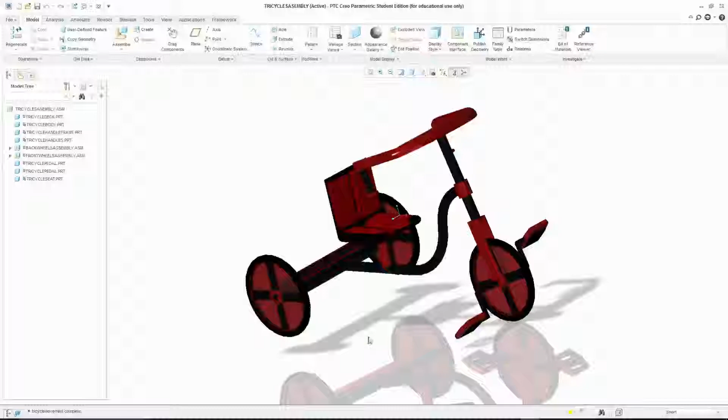My tricycle has a more toyish yet modern look with accompanying safety features that may be more popular among parents and kid-friendly. The first thing I would like to comment on is the actual wheels of the tricycle.

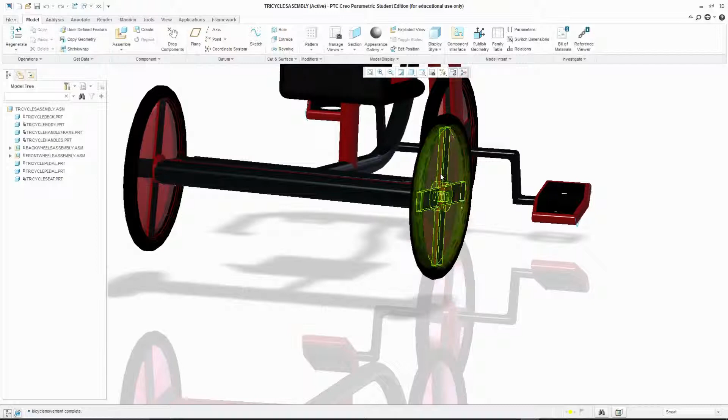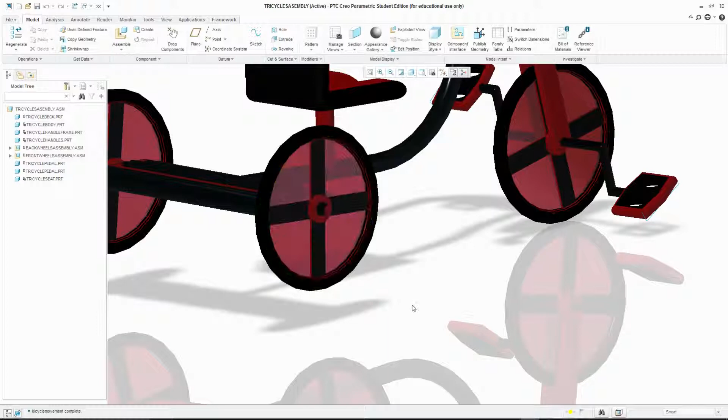It has these thick, large rectangular spokes as opposed to thin wire metal spokes. I chose this design because with those spokes, kids could get their hands or feet stuck in the wheels while spinning, which could injure them. That's why this design also has a reinforced plastic film, so a kid cannot get anything stuck inside the wheel. Ultimately, it makes it safer and gives it a more fun and aesthetic look.

For the deck in the back, we have these ridges so that if a user wants to stand on the back, they would be able to, and these ridges would apply extra traction so they wouldn't fall off as easily.

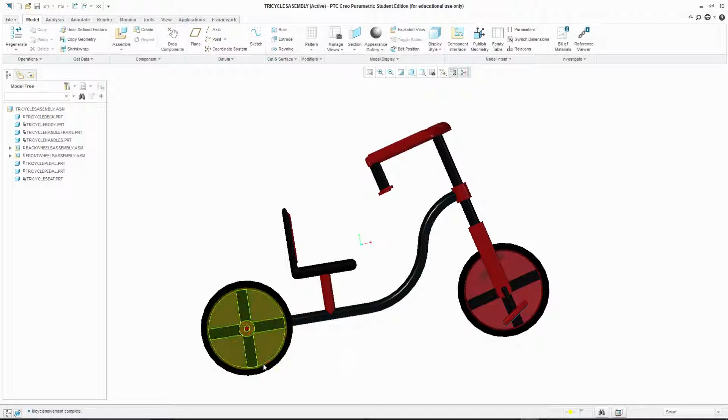The overall design of the bike has a low riding design where the seat is oriented closer to the ground. This distance here is about 1 foot, and the handles and wheels are oriented upward and downward respectively towards the seat.

This seat is also not a normal triangular seat, but more like an actual chair with padding and leather, which makes it more comfortable and gives back support to the kid while riding.

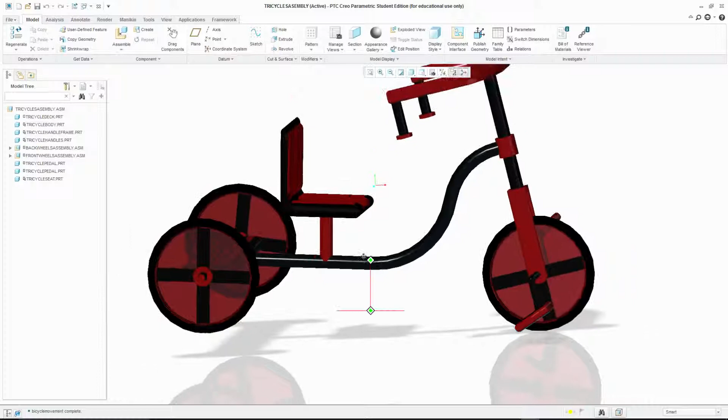Also to note are the handles. They are downwardly oriented, going straight down as opposed to horizontally, meaning that steering is slightly different—almost like steering a rocket ship or a boat, giving the user a more unique feel, even if it's not as efficient.

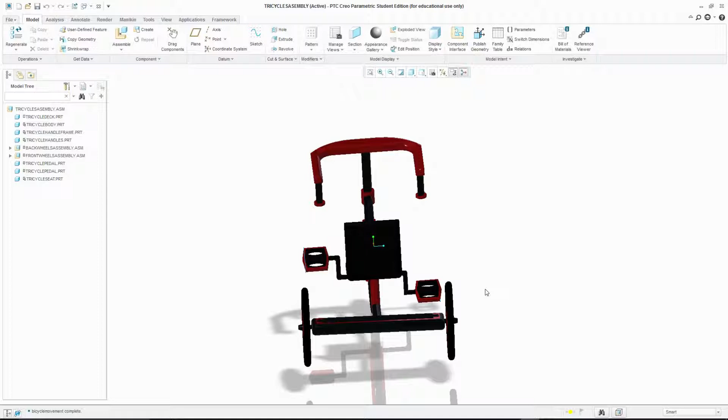But kids ride tricycles for fun, not for speed, efficiency, etc.

Over here we have the pedals, which have holes made inside so that they're lighter and provide more traction for the feet, so kids don't slip.

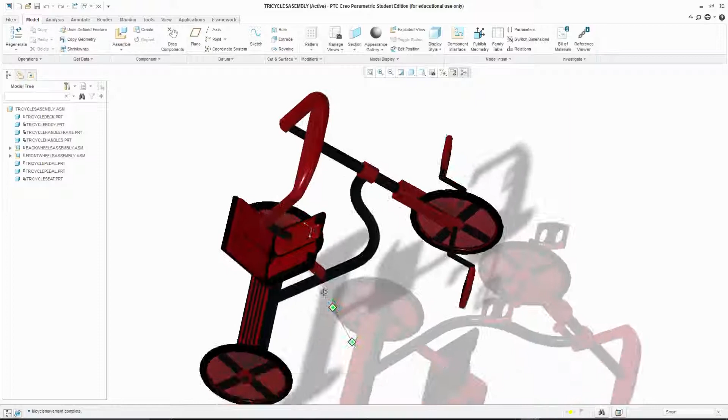Speaking to the tolerances of the bike, the shafts used for the main body, the chair, and the front frame all have basic sizes of 40 millimeters. These connections use an interference fit of H7P6 according to an ANSI table, but this one here uses a free running fit because it has to turn.

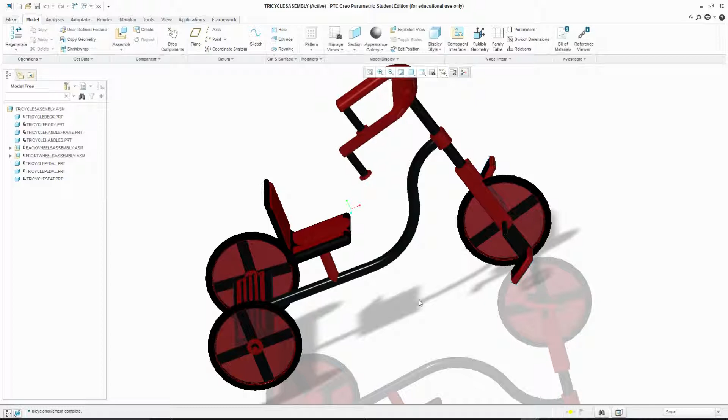The H7P6 values for the 40 millimeter basic size were 40.042 millimeters and 40.026 millimeters for the shaft's upper and lower tolerances, while for the hole they were 40.025 millimeters and 40.00 millimeters.

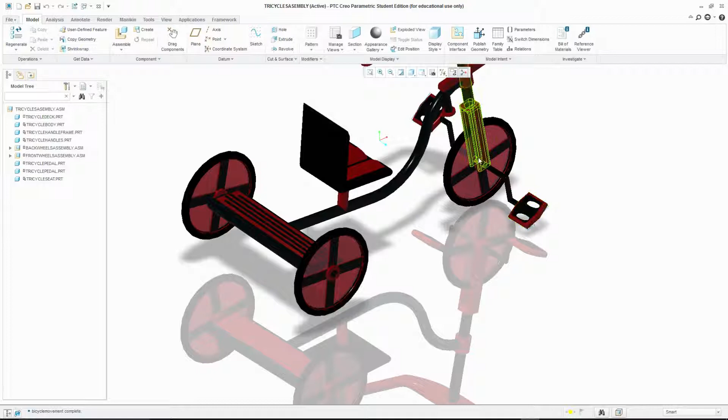The axle, on the other hand, has to use interference fits for the wheel assemblies—for the lug wheel and the axle, and for the axle, pedal, and wheel. But when connected to the actual frame or deck, you need a free running fit because you want the axle to rotate.

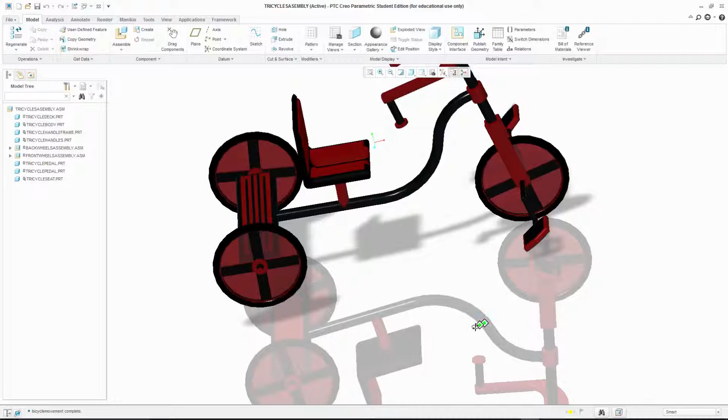For the free running fit, you'd have 20.00 and 19.948 millimeters for the upper and lower tolerances of the shaft, while you have 20.117 millimeters and 20.065 millimeters for the tolerances of the hole. The free running fits use D9 H9 values from ANSI, while the interference fits use H7P6 values.

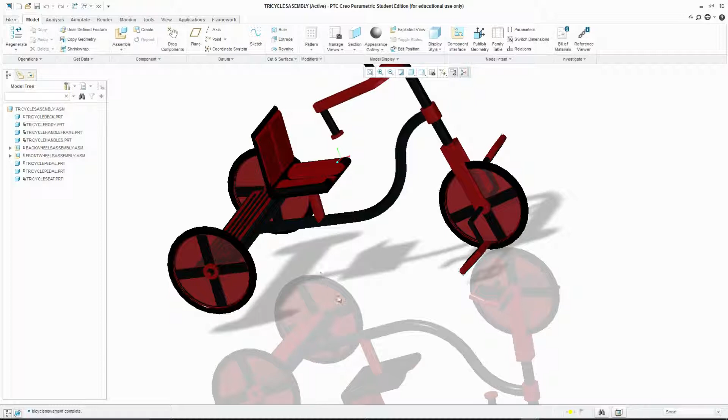Now let me show you an actual simulation of the bike.

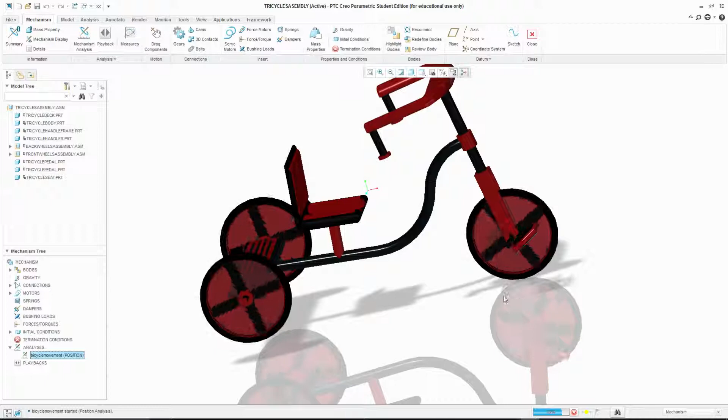As you're about to see, these three wheels move at the same time because the angular velocity set on their servo motors are all around the same. Also, the pedals are given the illusion of not moving relative to the wheel because the angular velocity was also set to the same value, meaning they wouldn't move. This gives the illusion that the bike is being ridden.

And that pretty much concludes our presentation.

I chose this color scheme because of personal preferences, and everything is rounded to make the tricycle more kid friendly, so there are no edges.